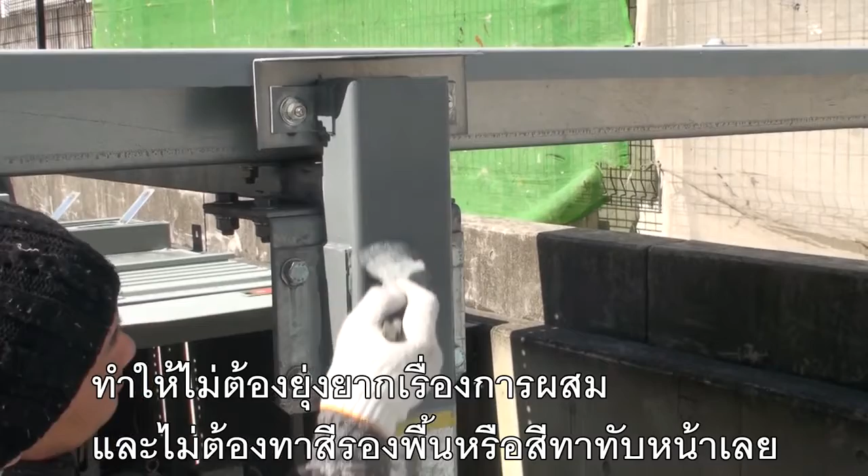Protect iron from rust. ROVAL Superior Anti-Corrosion Paint. ROVAL contains 96% pure zinc powder in its dry film. As it's pre-packaged in single packs, it doesn't require mixing or the additional use of a primer or top coat.

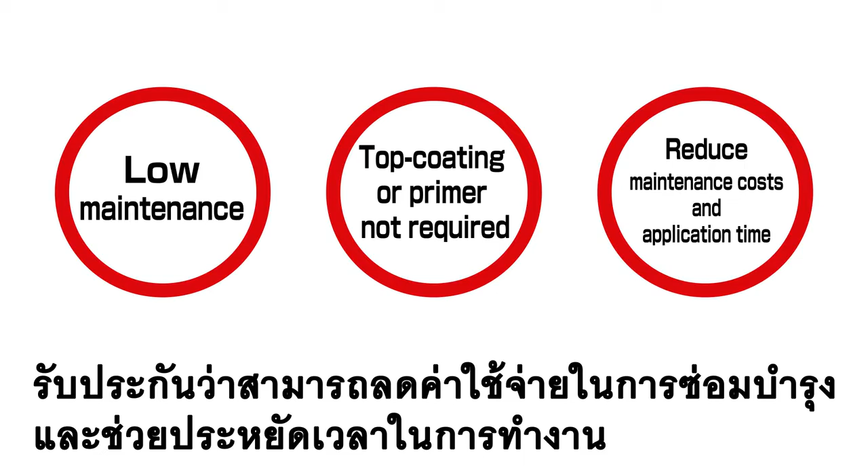It's easy to use and can be applied directly to steel and galvanized surfaces. ROVAL is low maintenance and guarantees a reduction of both maintenance costs and application time.

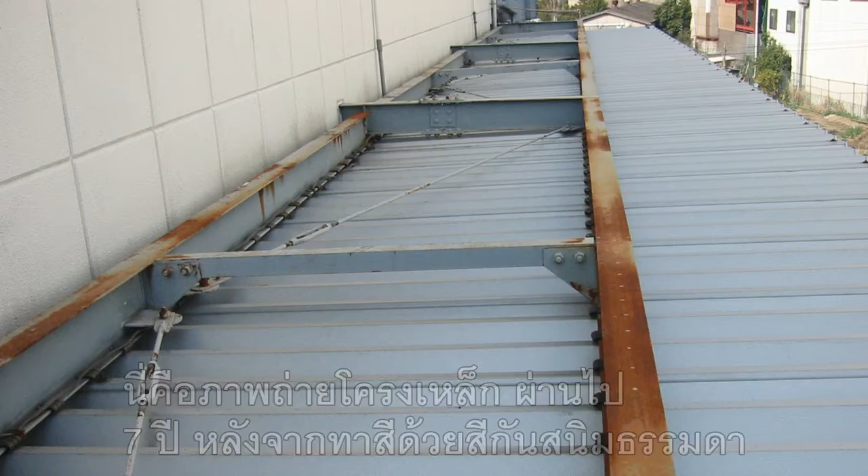This is a photograph of steel frames 7 years after being painted with conventional paint. The paint film has deteriorated and rust has spread throughout. This steel frame will be repainted with ROVAL.

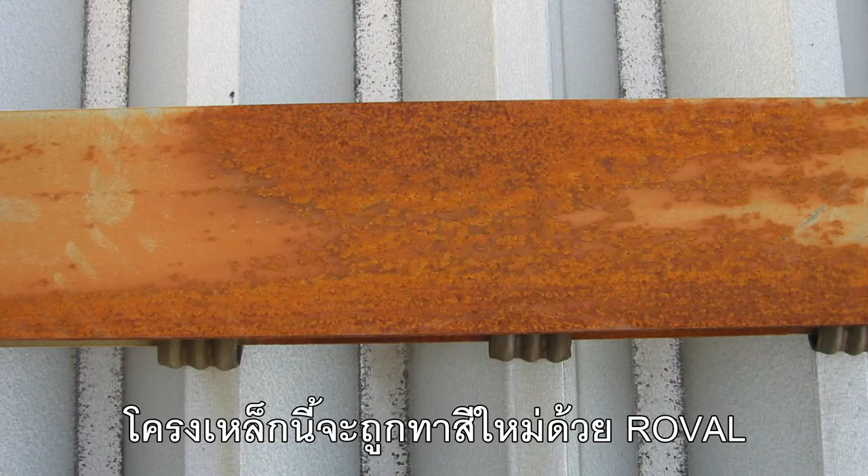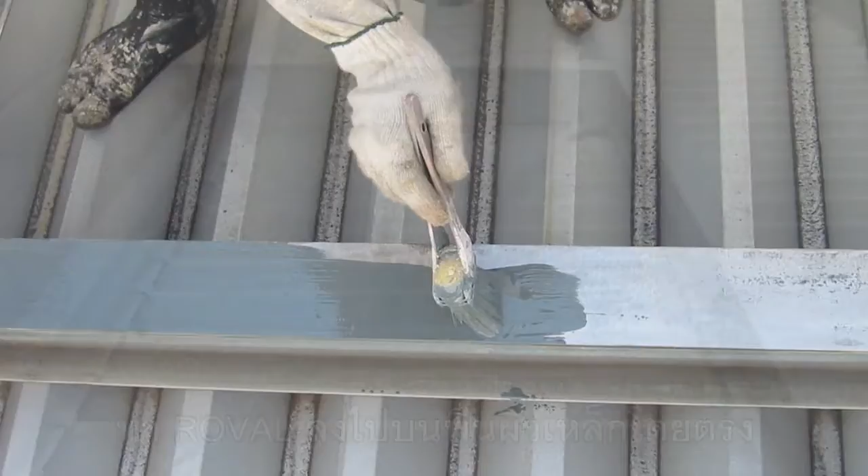Remove all rust and old paint with the appropriate power tools. Apply ROVAL directly to metal surfaces. Here is a photograph of steel frames 10 years after being repainted with ROVAL. There is no rust.

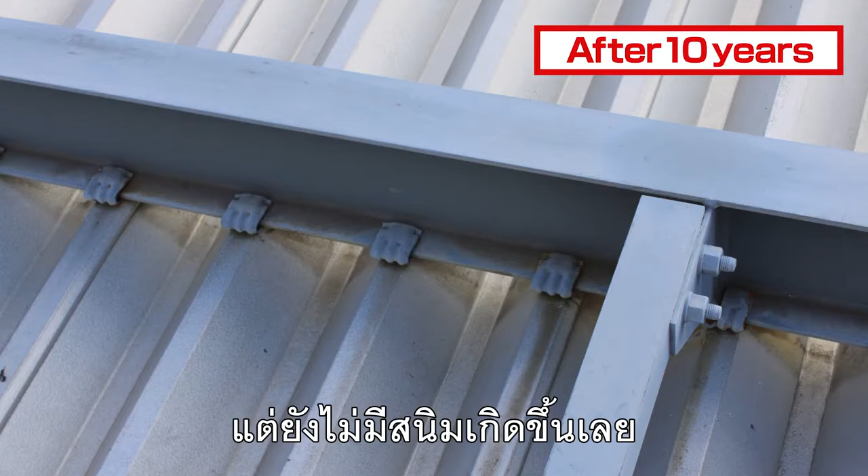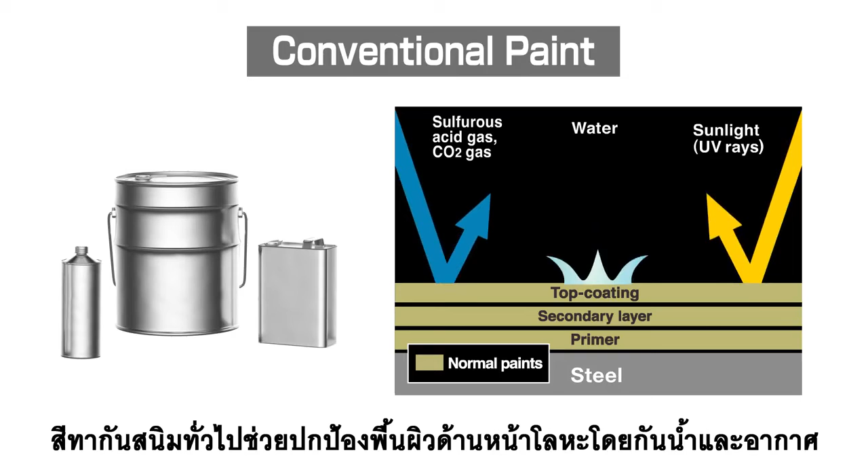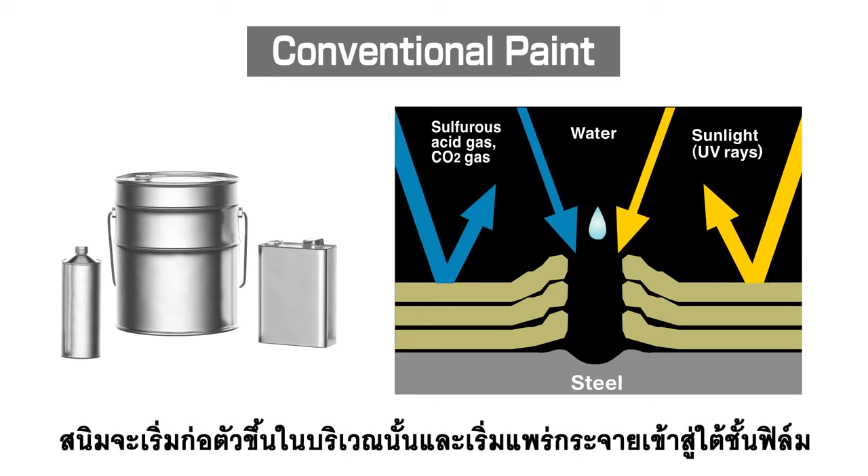What is the difference between ROVAL and conventional paint? A conventional paint film acts as a surface barrier against water and air. But once the film is damaged or has deteriorated, rust develops in that area and begins to spread underneath the film.

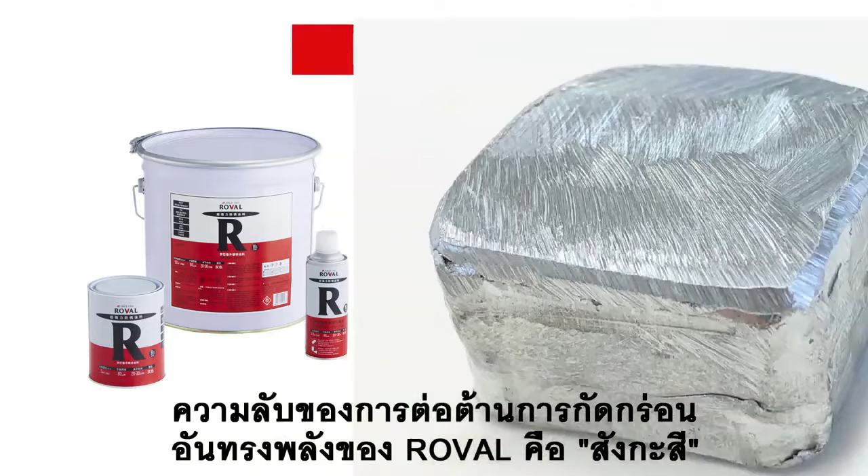The secret of ROVAL's powerful anti-corrosion is zinc. The metal zinc rusts more easily than iron. By using this property, keeping the iron and zinc in close contact, only the zinc side will rust and not the iron. Let's actually verify.

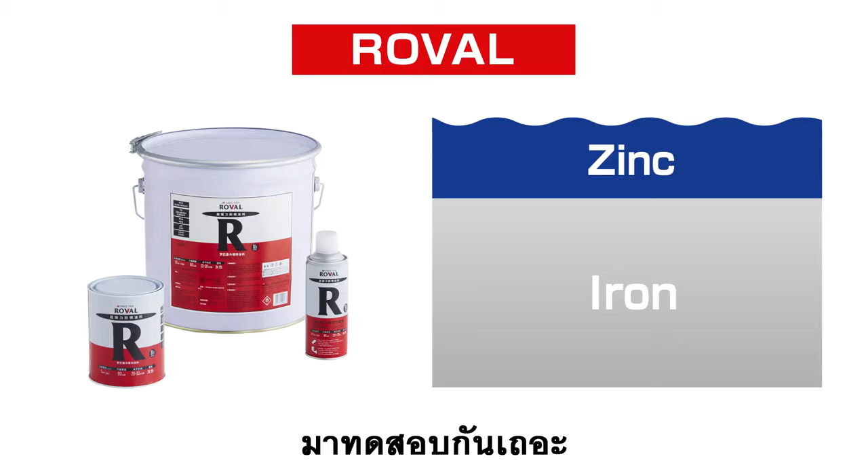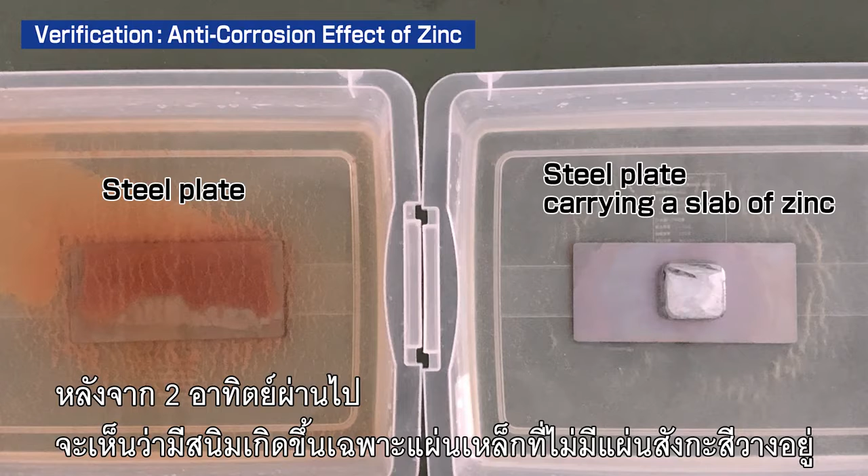Prepare 2 steel plates and immerse one in salt water. On the other steel plate, put a slab of zinc and immerse in salt water. After 2 weeks, only the steel plate without zinc has rusted. On the other hand, the steel plate carrying a slab of zinc has not rusted. The zinc protects the iron by rusting instead of the iron.

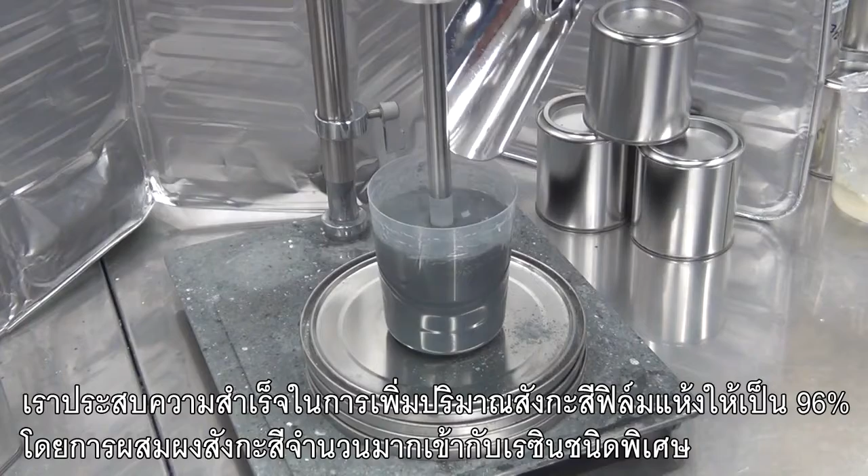We succeeded in raising the dry film zinc content to 96% by mixing a large amount of zinc powder into a special resin. Our competitors usually use around 70 to 80% zinc in their products, but we use a staggering 96%. ROVAL is a paint that can make the most of the anti-corrosion ability of zinc.

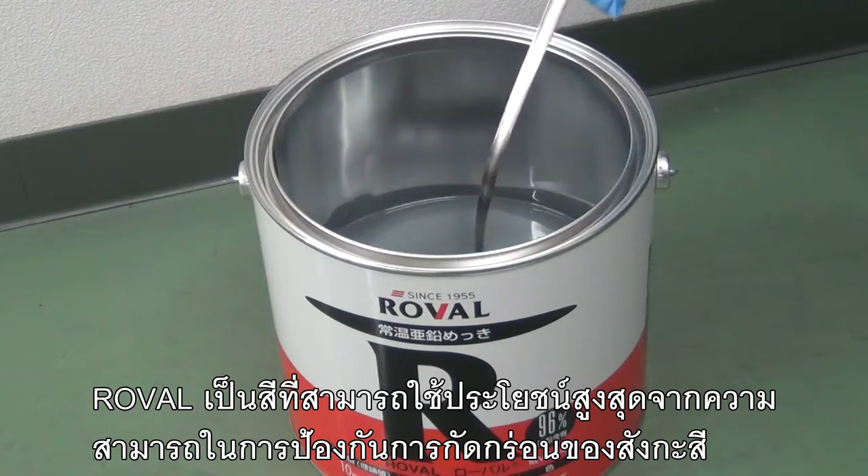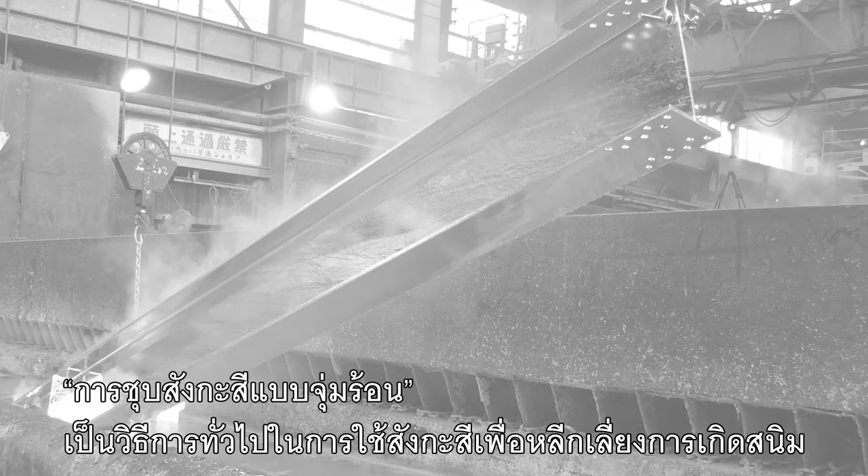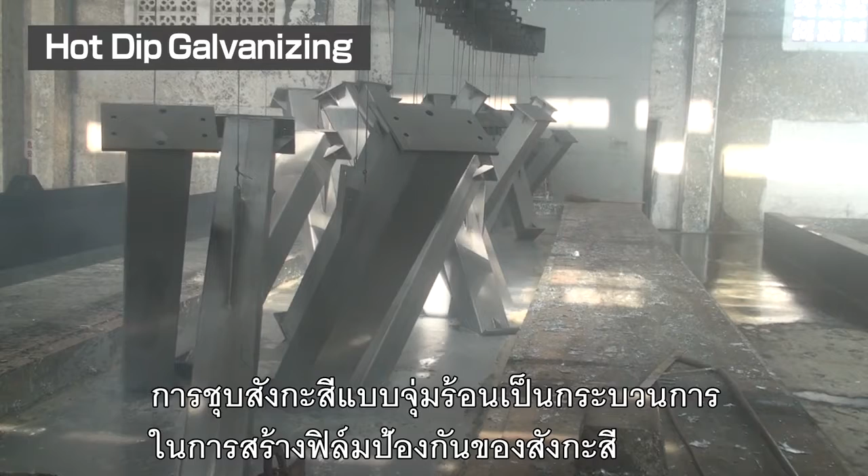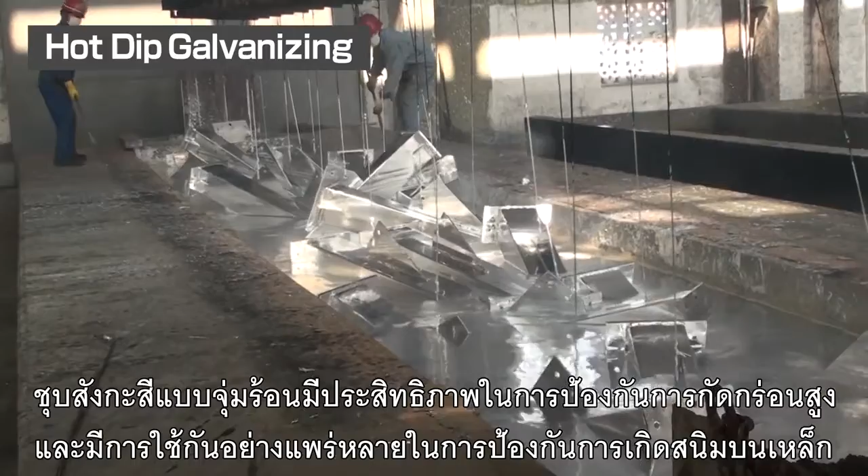Hot dip galvanizing is the most common method of using zinc to avoid rust. Hot dip galvanizing is the process of forming a protective film of zinc by dipping steel structures into molten zinc with a temperature above 430 degrees centigrade. Hot dip galvanizing has high anti-corrosion performance and has been used widely for rust prevention on steel.

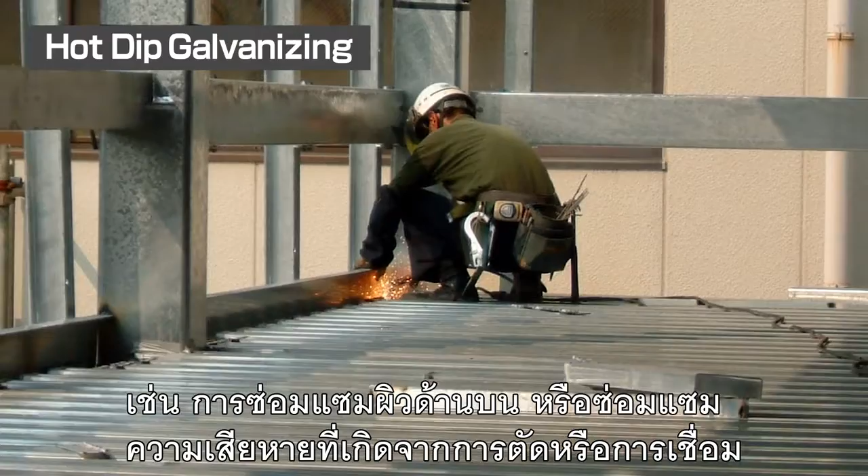Since this process requires the use of large equipment, it is not practical for small applications such as touch-ups or repairs of damages done by cutting or welding. Conventional paints are not suitable for such repairs because they do not provide strong enough protection. ROVAL combines the ease of painting with the excellent corrosion resistance of hot dip galvanizing.

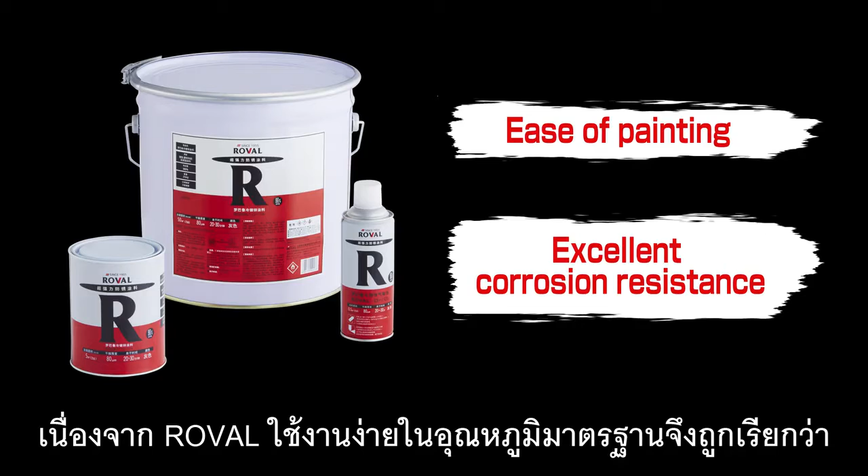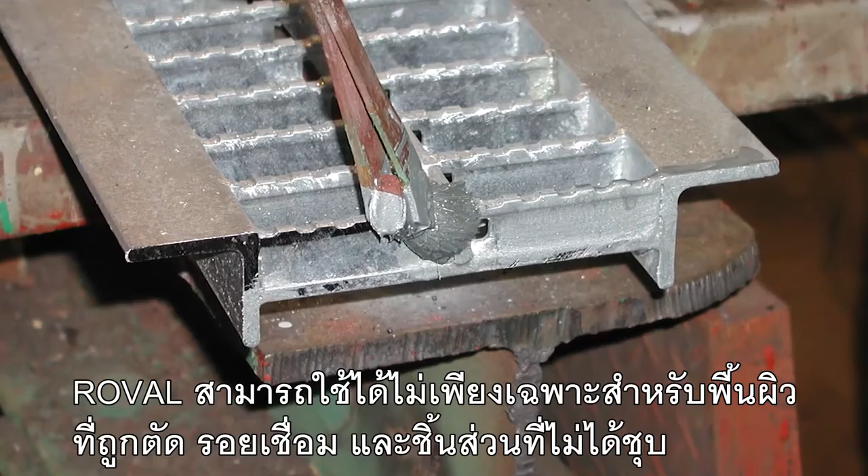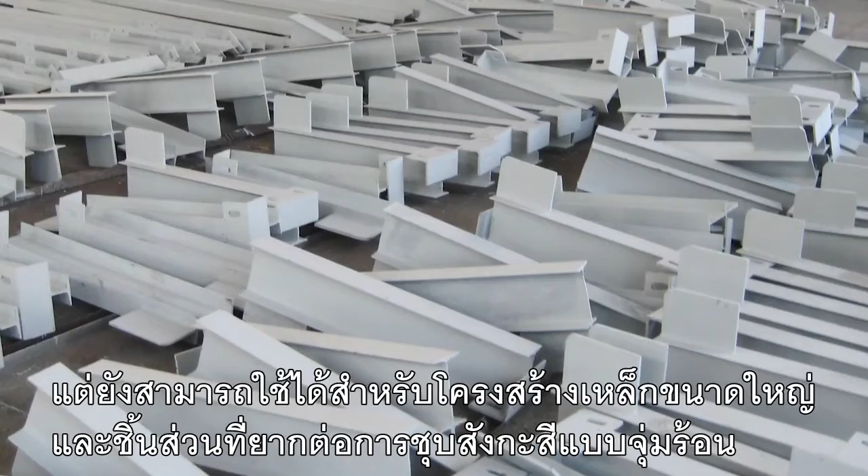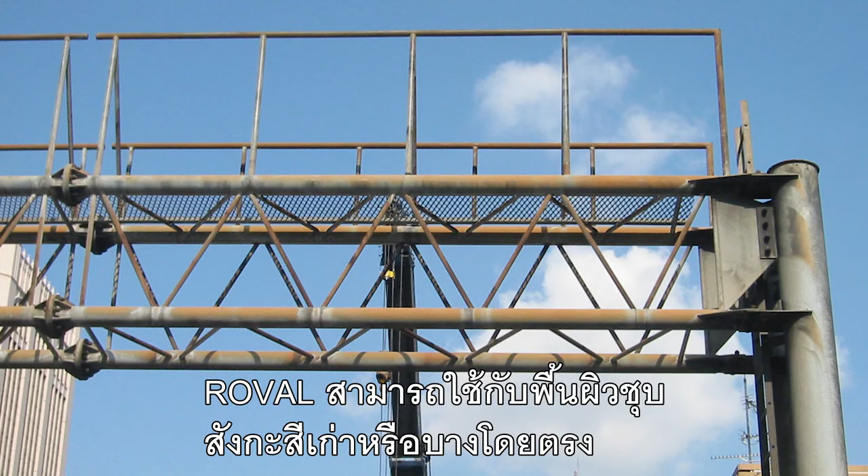Since ROVAL is simply applied in standard temperatures, it is called cold galvanizing compound. ROVAL can be used not only for touch-ups of cut surfaces, welds, and non-plated parts, but also for large steel structures and parts that are difficult to be hot dip galvanized. ROVAL can be applied directly to old or thin galvanized surfaces to prolong the anti-corrosion effect without the need for additional re-galvanization.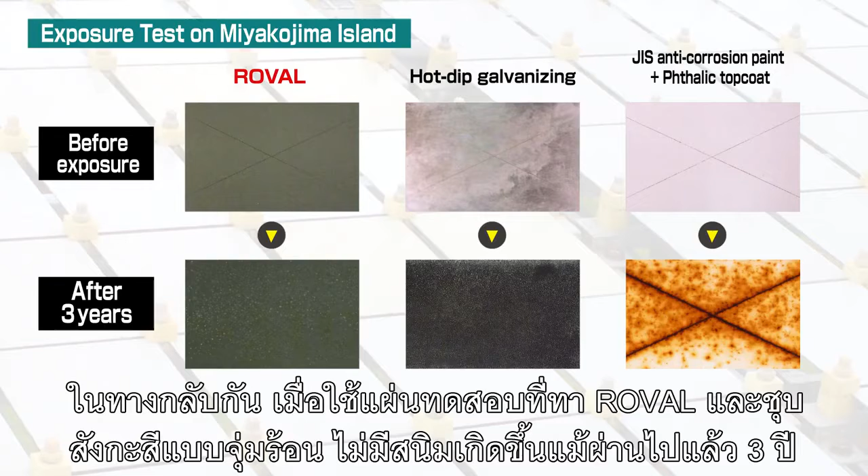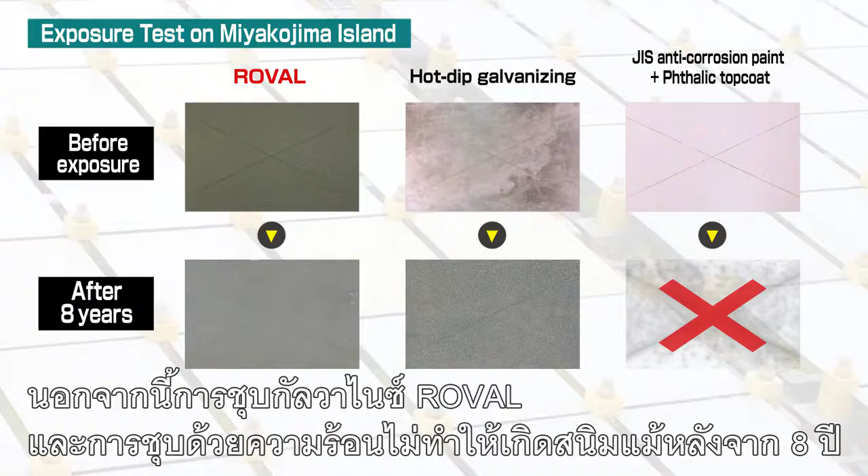On the other hand, with ROVAL and hot-dip galvanizing test pieces, no rusting occurred even after 3 years. In addition, ROVAL and hot-dip galvanizing did not generate rust even after 8 years. As you can see, ROVAL alone can guarantee long-term maintenance-free performance without the need for a primer or top coat in an easy application format.

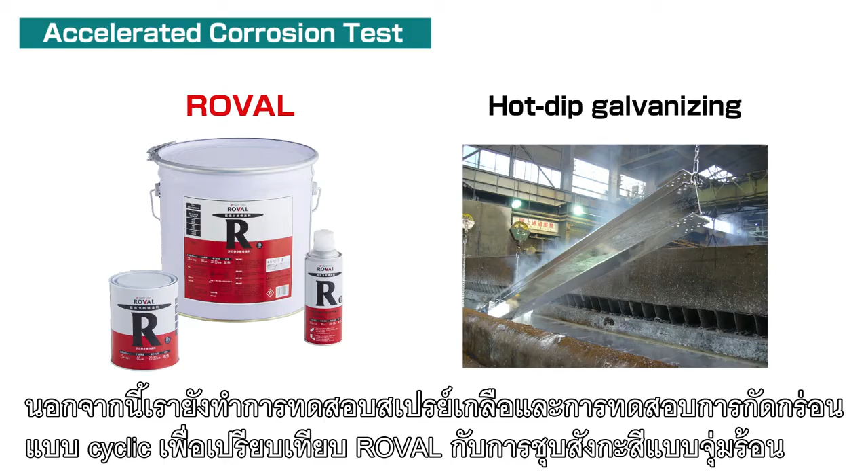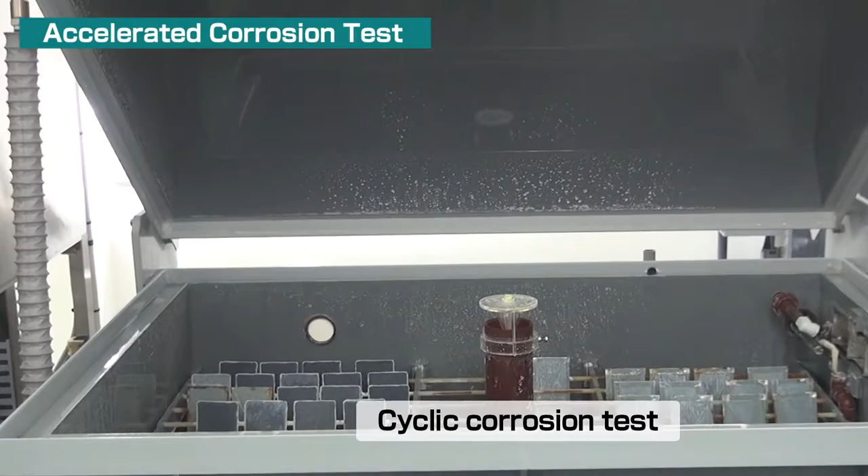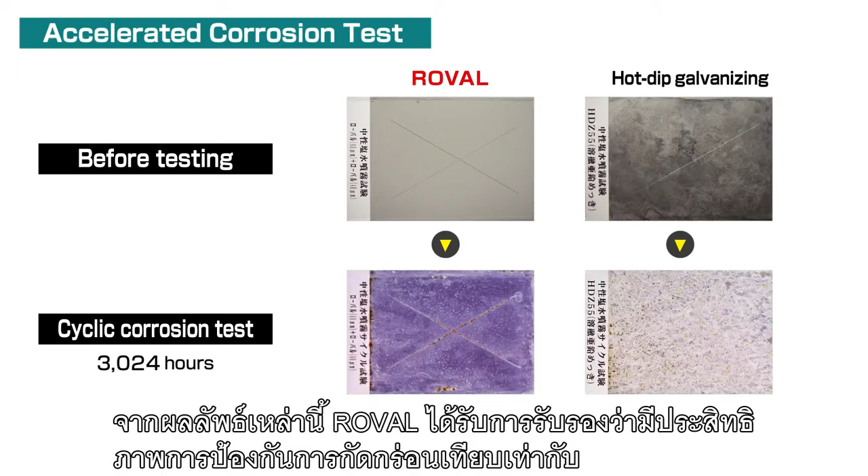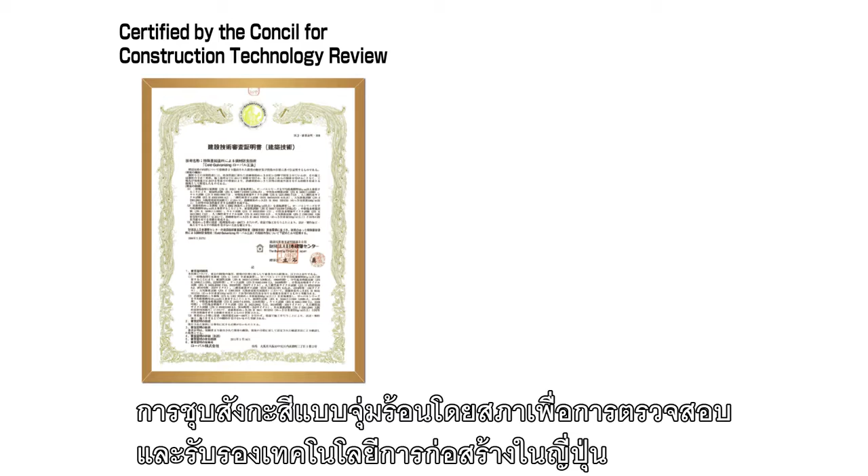We also conducted a salt spray test and a cyclic corrosion test to compare ROVAL with hot-dip galvanizing. Here are photos of the test results. From these results, ROVAL has been certified to have equivalent anti-corrosion performance as hot-dip galvanizing by the Council for Construction Technology Review and Certification in Japan. In addition, ROVAL's excellent performance was recognized and certified by the Minister of Land, Infrastructure and Transport.

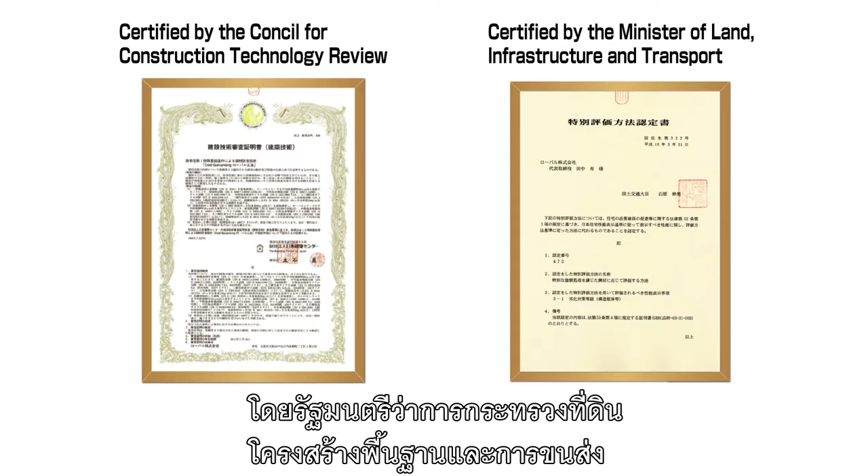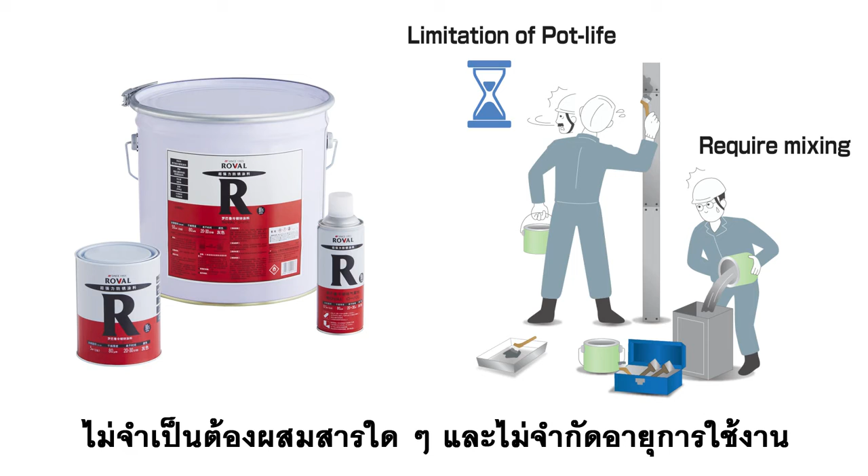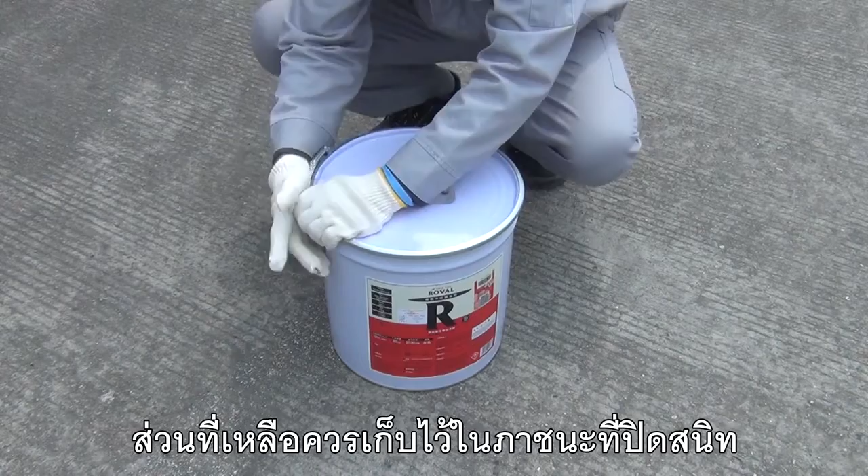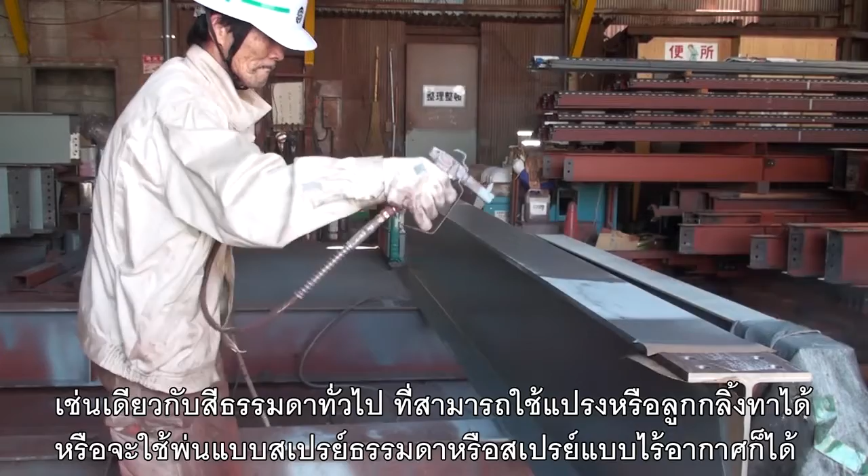ROVAL is an easy-to-handle, single liquid-type compound. It does not require any mixing and has no limitation of pot life. The rest of the paint can be kept in a closed container. Like other conventional paints, it can be applied with a brush or a roller, as a conventional spray or an airless spray. An aerosol version is also available.

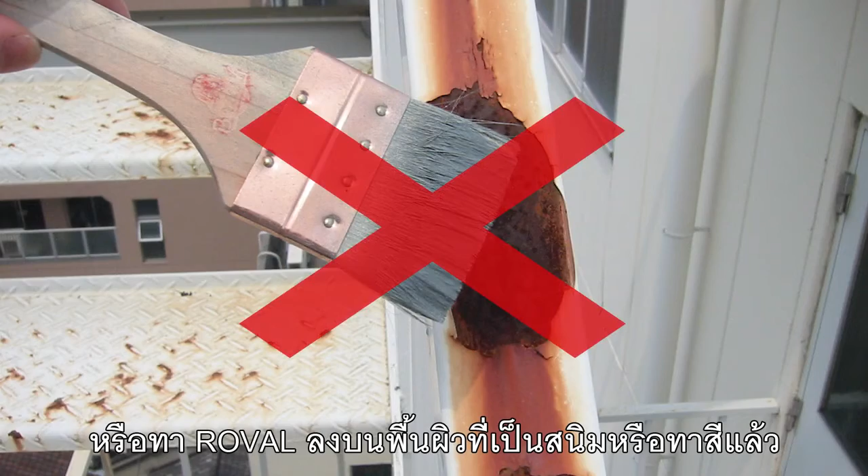The most important factor in the application of ROVAL is to apply it directly to the steel or galvanized surface. Do not use a primer or apply ROVAL to rusted or painted surfaces. 3 other important factors in the application of ROVAL are proper surface preparation, adequate agitation, and sufficient film thickness.

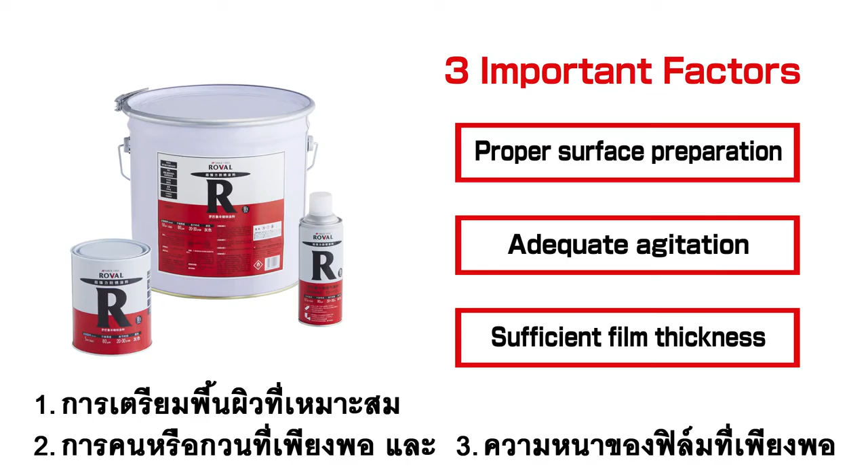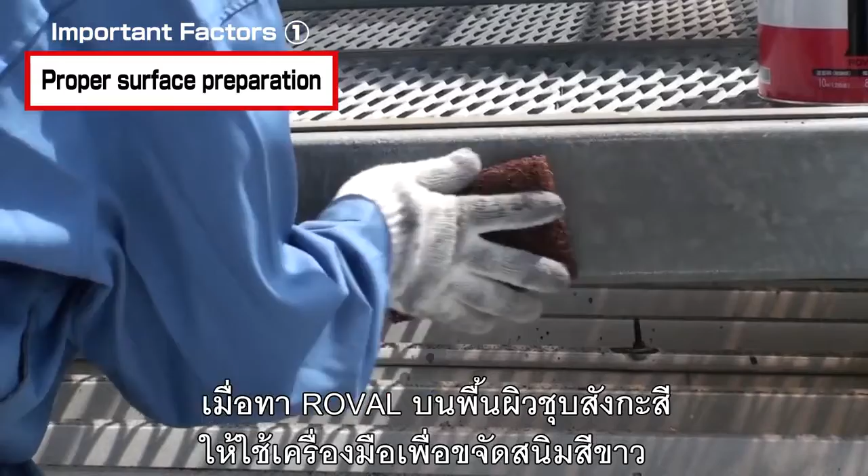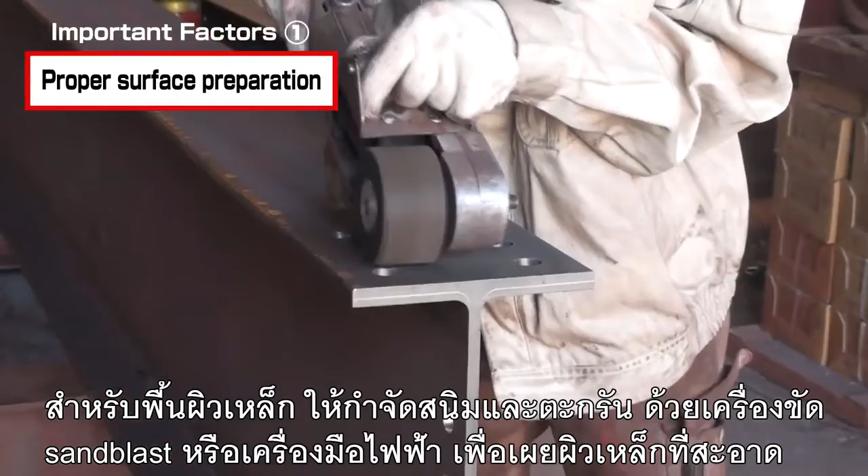1. Proper surface preparation. When applying ROVAL on galvanized surfaces, use a hand tool to remove white rust. For steel surfaces, remove all the rust and mill scale by sandblasting or using a power tool to expose the clean steel surface.

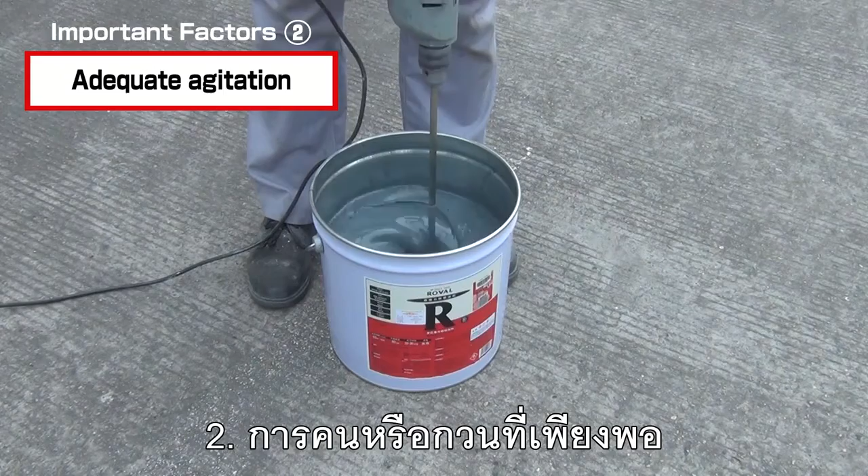2. Adequate agitation. Because ROVAL contains a lot of powdered zinc, the contents may settle at the bottom of the can. Use a power paint mixer to obtain uniform viscosity. ROVAL's viscosity is pre-adjusted. Dilution is not required.

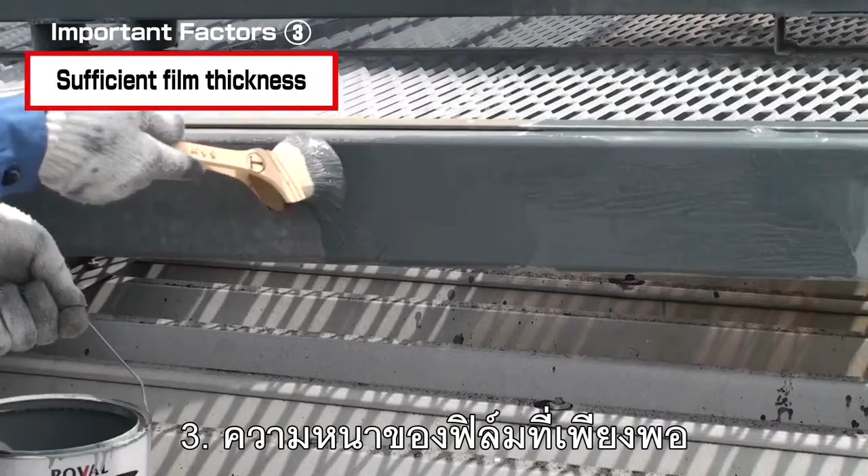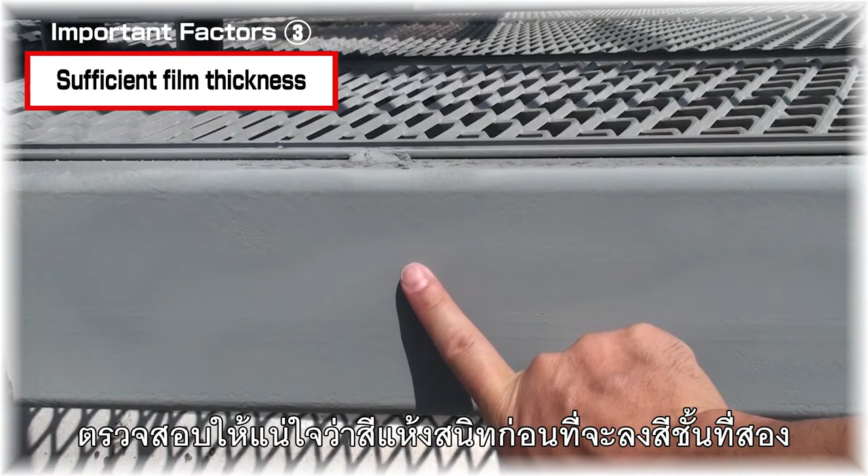3. Sufficient film thickness. Anti-corrosion performance is directly proportional to dry film thickness. Do not spread the paint too thin. Apply 2 coats of ROVAL to obtain a film thickness above 80 micrometers. Make sure the paint is dry to touch before applying a second coat.

While keeping the outstanding anti-corrosion ability of ROVAL as it is, we have launched a water-based version called Aqua ROVAL. Compared to ROVAL, Aqua ROVAL cuts VOC by 93%, has no thinner odor, and no fire hazards. You can use it with confidence in shopping centers, train stations, and public facilities.

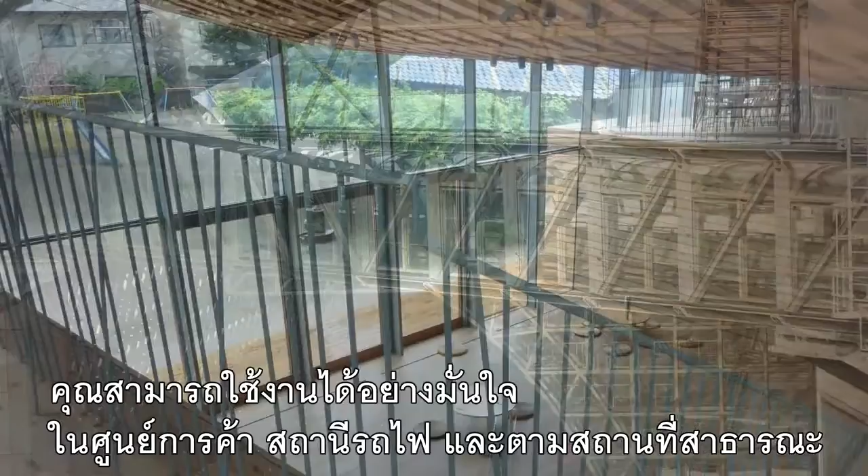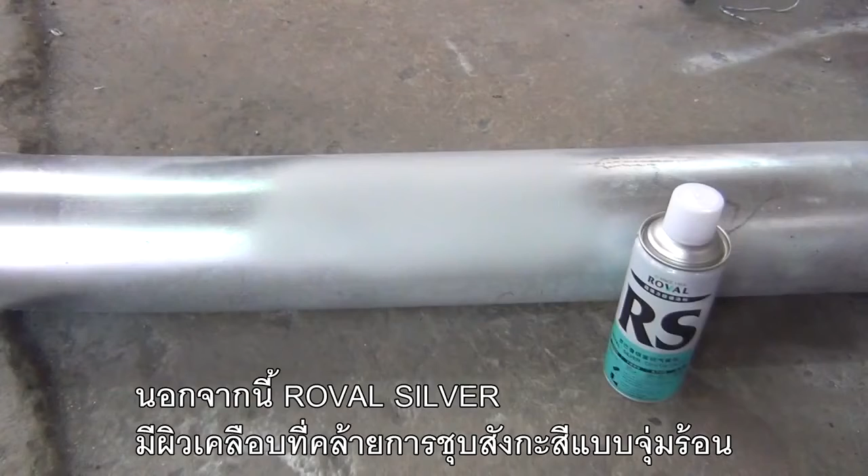In addition, ROVAL Silver has a similar finish to hot dip galvanizing. We also offer a cosmetic spray for zinc plating, MC Spray, which is ideal for color matching after hot dip galvanization and for hiding blemishes or ROVAL repairs.

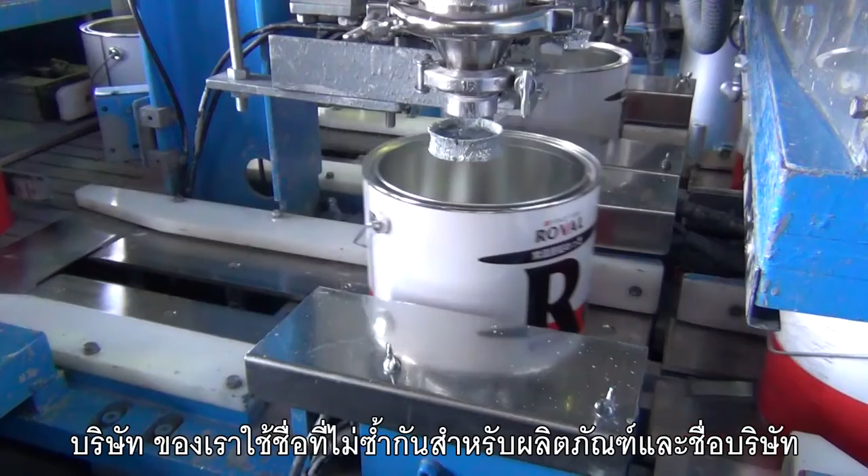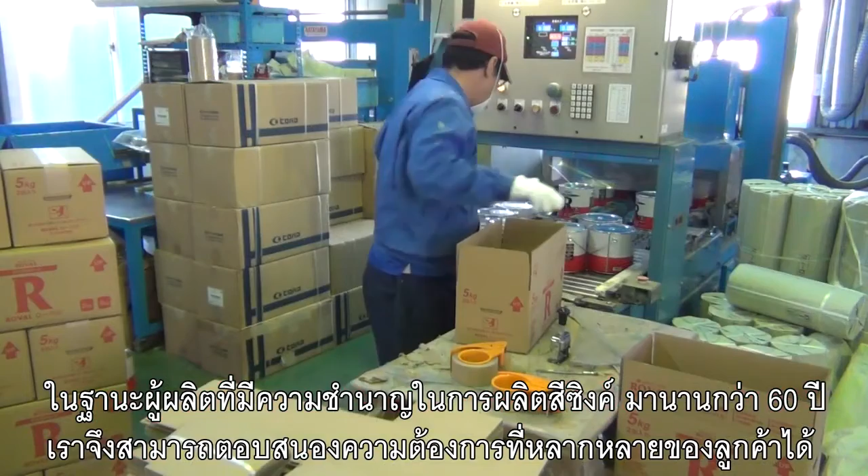ROVAL Corporation was founded in 1955 in Osaka, Japan. In 2003, we also established Shanghai ROVAL Zinc-Rich Paint Corporation in China. Our company shares the same unique name for its product and company name. As a specialized manufacturer of zinc-rich paint for over 60 years, we have responded to the various needs of our customers. We supply high-quality paints to Japan, China, and around the world.